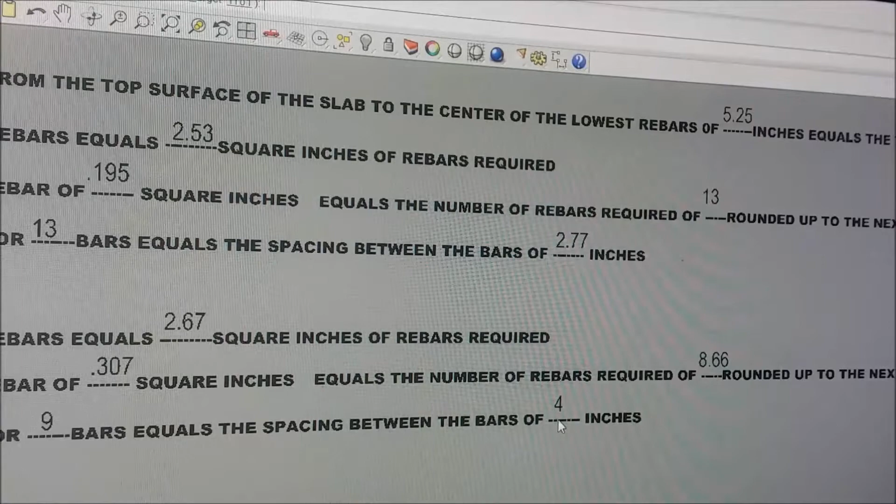You have other bars going the other way, like every third spacing, you have a bar going. It just keeps them from moving left and right. They have to be pulled only on their length. There's no strength to them left and right. It's like a guitar string left and right.

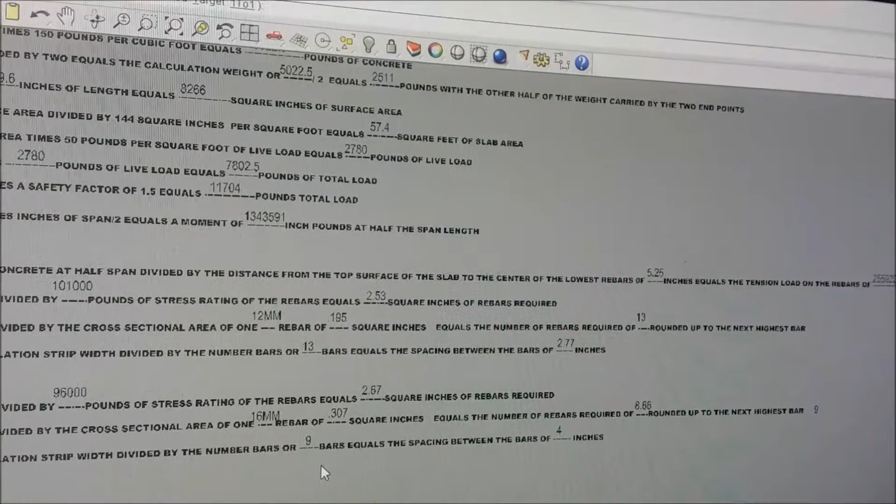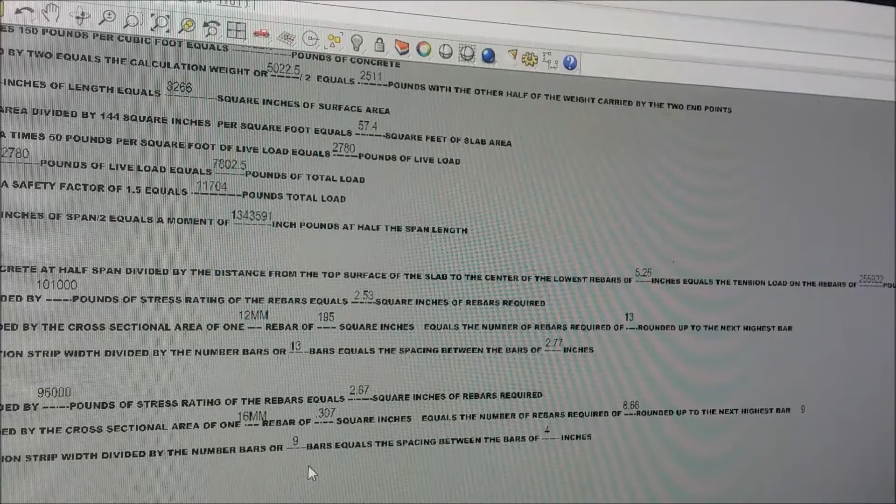Okay, taking up from where we left off, you'll notice we went to a larger bar, and we're using a lot less of them. The strength of the bars is lower, but we're using more square inches because of that. And we ended up with 9 bars instead of 13. So that's a pretty good savings right in there.

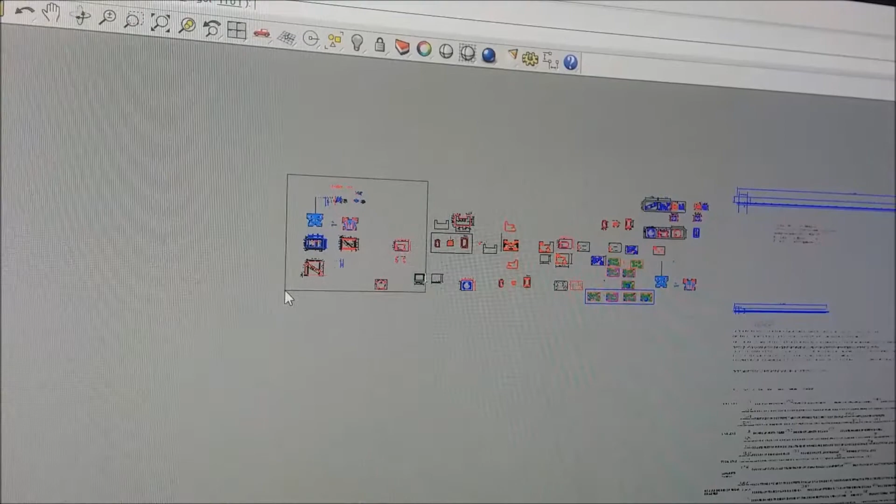And what do we got down here? Oh, okay, let's go on a field trip up here to something. What we have up here, I could change the dimensions on the drawing. Let's see, it's going to change on the ones we're going to actually look at.

Forget that. You'll notice that... please. What is it doing? Oh, the drawing auto saves because I moved the screen. It wants to save it.

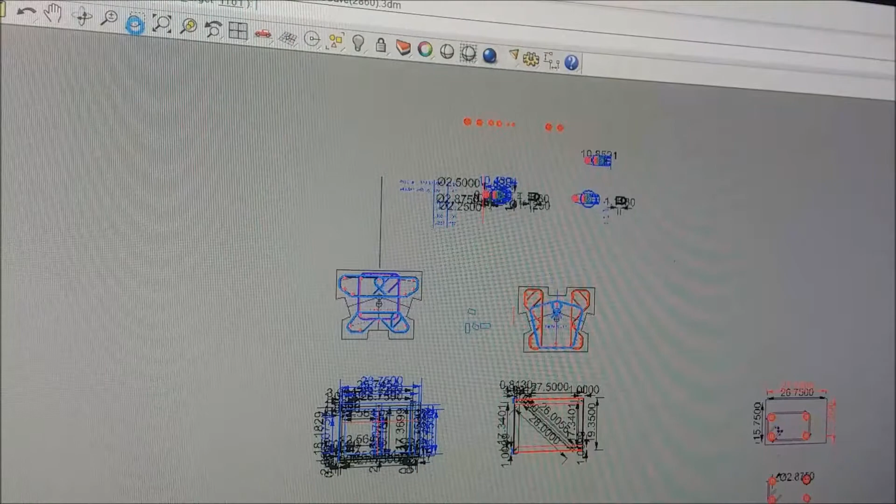Okay, you'll notice that every place there's a bar, these are looking down through the column, the rebar wraps around it like a corner, sort of holds it in both directions. All these rebars are near a corner. Some of them are on a corner. Some are at an intersection, near a corner, sort of near a corner, at a corner.

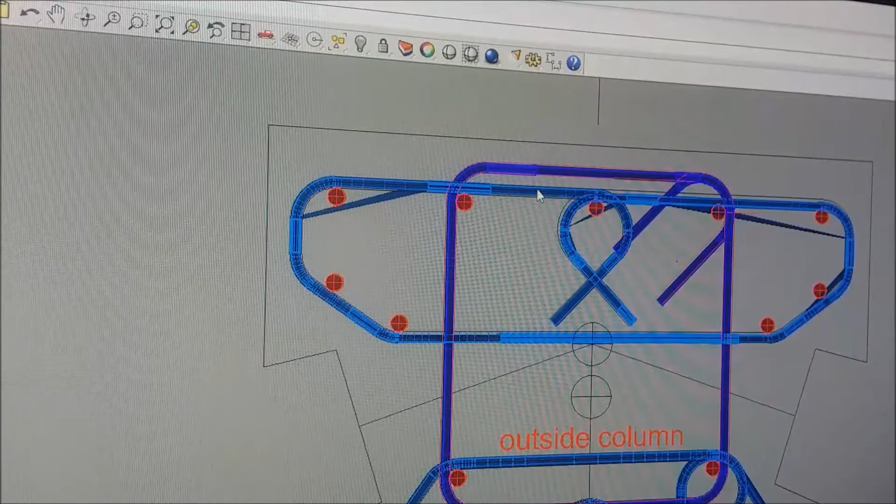This stirrup is 3 separate pieces: the dark blue piece, the square-looking piece, and then the ones I don't know if it was me or the employees, we decided to call them the butterfly wings. Also, it looks like a really fat little airplane to me.

So they're all in the same block. Okay, the outside black line, that's the shape of the column. And you'll notice there's a 2.5 inches deep, 7-inch wide notch cast into all of them. That's why we have all these weird angles, is to keep the bar cover near the shape of the actual concrete. If this was a rectangular post, we'd have the outer rectangle, and then where these other ones we'd have a square or rectangle surrounded them, so that they're still always around the rebar.

If you have one that's got, say, 3 across this end, 3 across the bottom end down here, down below where we're at, and then 3 on each side. Like it was this dark blue looking thing here. See, if that square was the outside rebar, but you would have rebars halfway. It'd be 3, 3, 3, and 3. So 8 rebars on a column, commonly done in the Philippines.

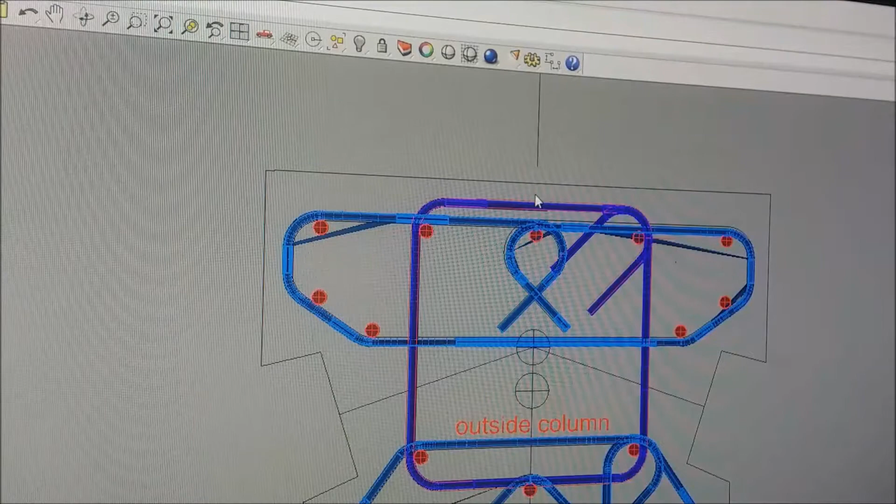You would see that a lot. What you do to catch these ones that are on the mid span, you put a diamond-shaped rebar in there. Recommended practices for reinforced concrete construction in the Philippines, published by the government, requires that diamond-shaped bar. And I have seen some expat builds that had them in there. I don't know who the architect was, but he either read the recommended practices, or he's a college graduate or was well read.

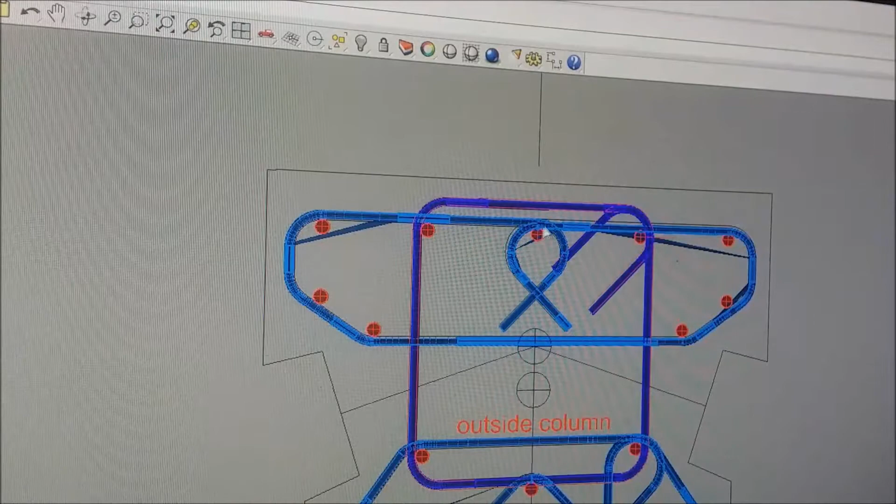Another thing you'll see on the stirrups is that this stirrup starts here, goes around, and then bends again. We call these 135-degree corners. They don't just get to that last place and go straight down parallel to the other one. Same thing with this one. It went around, all the way around, come back, and this keeps the rebar from being stripped out of the concrete. This is also required, and I see about 10% of the builds in the Philippines have the 135-degree ends.

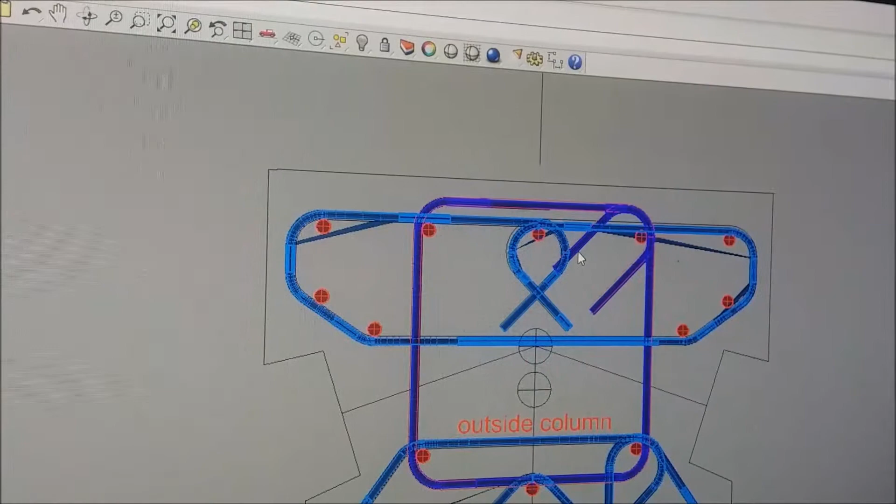But what we're here for... Oh, we can make a little rest stop here. This black line here is a steel plate that we have on a. It bolts to the top of the work table, which is 2 4x8 sheets of plywood. We use it for everything. And the red things here, you see, you could if it was bigger.

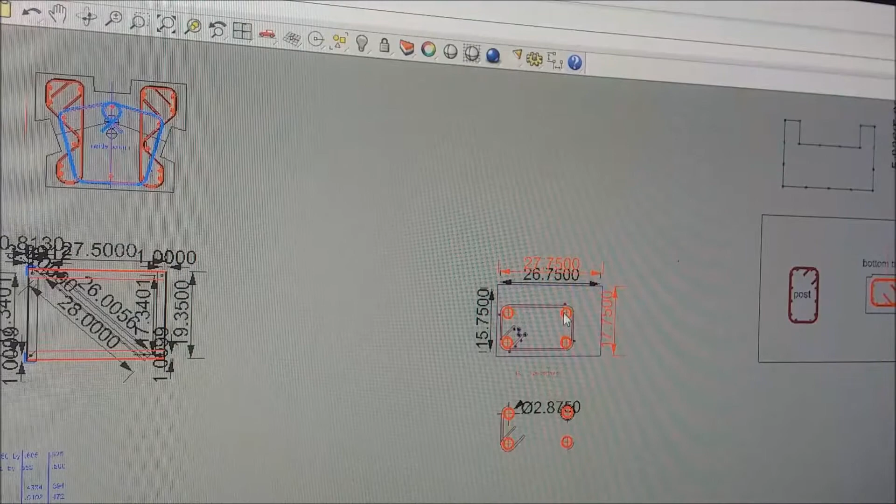These red things are Schedule 80 2-inch pipe, chosen because there's a minimum bend radius on rebar. Everything on rebar is measured in bar diameters, like 16 or 27 bar diameters of lap when you join two bars end to end. You should offset them so the two going away are exactly in line with each other. No, that's not done - it is done, but not by me. I've got enough problems, but that's the right way.

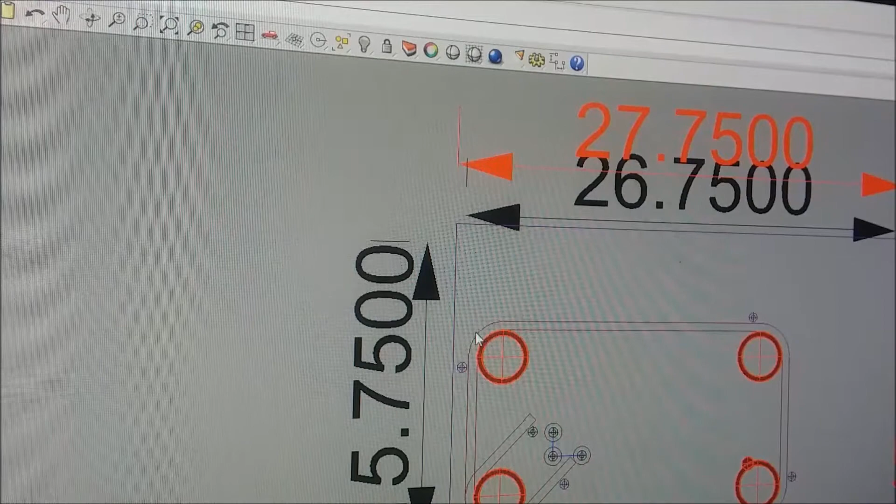This is the minimum bend radius for a number 16 bar, 16 millimeter bar, or number five - same thing. So it looks like our corners are big, but we're not bending them around a 3/4 inch bolt or something, which puts a much sharper bend. So with this, we have not overstressed it towards cracking. We've never had a bar crack when we bent them. Some people do, but we have the right radius - we don't have a problem.

There's bending plates for every shape we use. This thing just went off the screen - that's common beams that we use throughout the house. We only have about 4 sizes, I think.

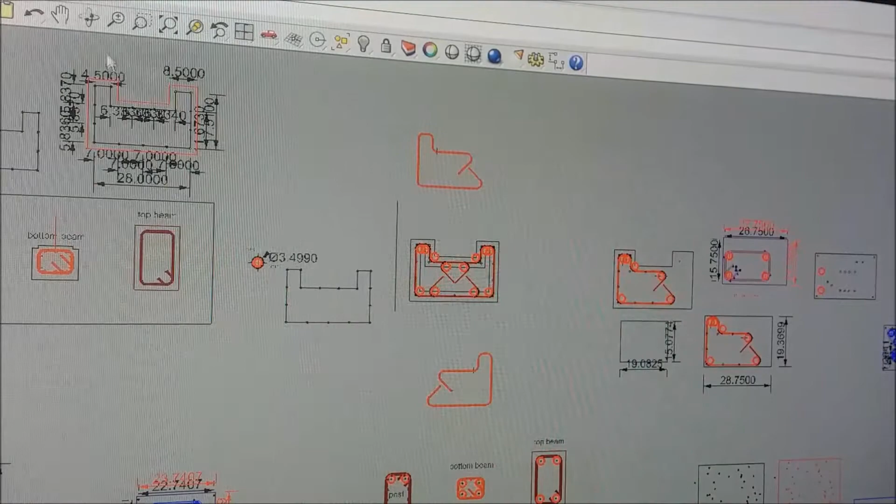This is the upstairs column. We call it upstairs, or we call it the closets - it's not really rooms, they're too small to be rooms. They're part of the ventilation system, but they look like rooms. We put actual stairs up there, so some days we call it the second floor. But there's no rooms, and it's got a 26-foot hole across the middle of it that's open for ventilation.

There's not really a lot of floor space you can walk on, but we have 10 columns. The black line is the shape of the column, and the pipes are what we bend this around. This is made as 2 pieces, a left and a right - that's why we have 135 degrees, because there's 2 actual bars.

This shape is cut out for an electrical sub panel. There's 10 electrical sub panels upstairs. We can hook any light in the house to any switch in the house. We can run a number 6 wire off any sub panel - if you wanted to put a large welding machine in the house while you're building it, just plug it in.

Also, because there's a big hole across the middle of the house, we don't want to run wire all the way around to get to something on the other side. So what we do is run a heavier wire to a sub panel, and that also gives you a lot more breakers.

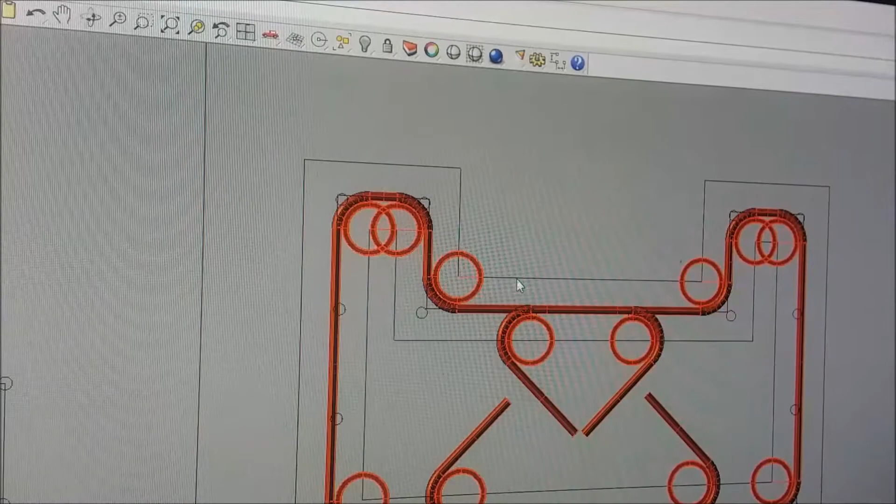We have 175 light bulbs in this house, LEDs - most of them are 6 watt. All of them can be powered by one 15 amp breaker and not even strain it. But we didn't want to have to buy all that wire and put the conduit in the concrete as we poured it for that many runs of conduit. And we don't - my personal preference, got nothing to do with legal or suggested or anything else.

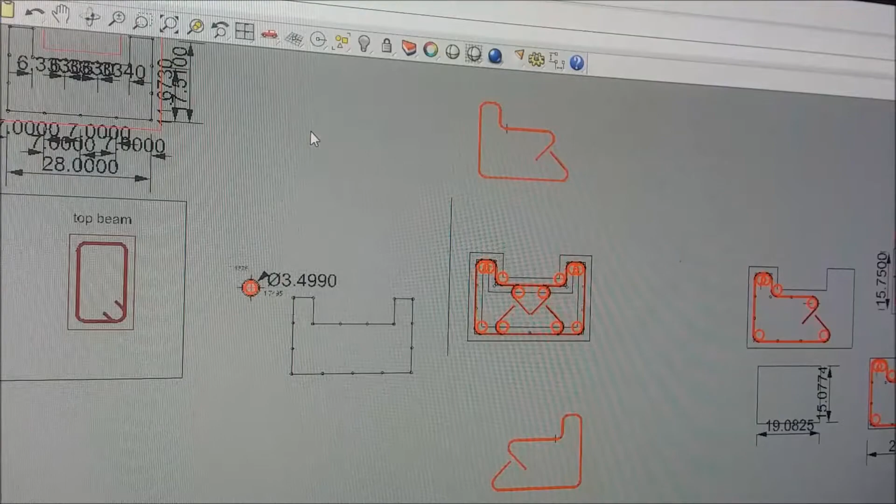I don't use B caps - what do you call them, wire caps, the little plastic things. Red is for the bigger size, and then you have yellows, and then oranges and blues for a smaller one. I just don't like to have those - I've had some trouble with people doing bad installations.

So that thing we just looked at, it's got a shape like this, and you flip it over, it makes the other side. But what we came over here to look at, other than the field trip - I have a reputation for field trips this way.

This is all the possible combinations of pipes - I think we have 3 of these plates, but you have 2 sides to a plate, and that gives us 6 times the area of our plate to bend rebar on. We have columns that are 32 by 35 inches, and all those rebars have been on these plates, so it takes up the whole plate.

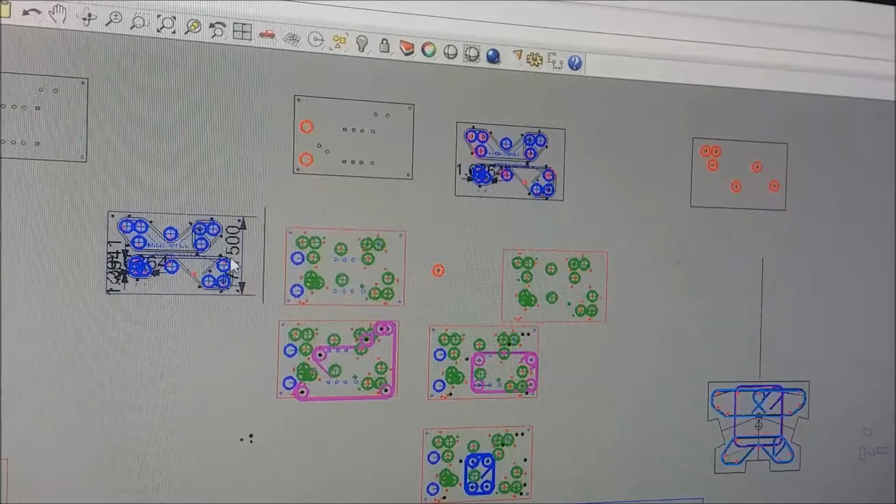We're going to sneak over here to something I might want to use in a minute.

Okay, I've chosen an example column. Actually, this is a beam laid down flat with all the bars on the bottom and the top. That's what goes around the dirty kitchen outside. It's like a footer beam, and all the loads are on these two surfaces. It's used also for upper tie beams on first floor wall.

It's 1.5 bar diameters up here, just like it is there. But the form has got a 45-degree corner. It's a US 4x4 cut on a diagonal, and that raises up this bar, and there's more concrete underneath it, of course, because you want to keep your 1.5 bar diameters.

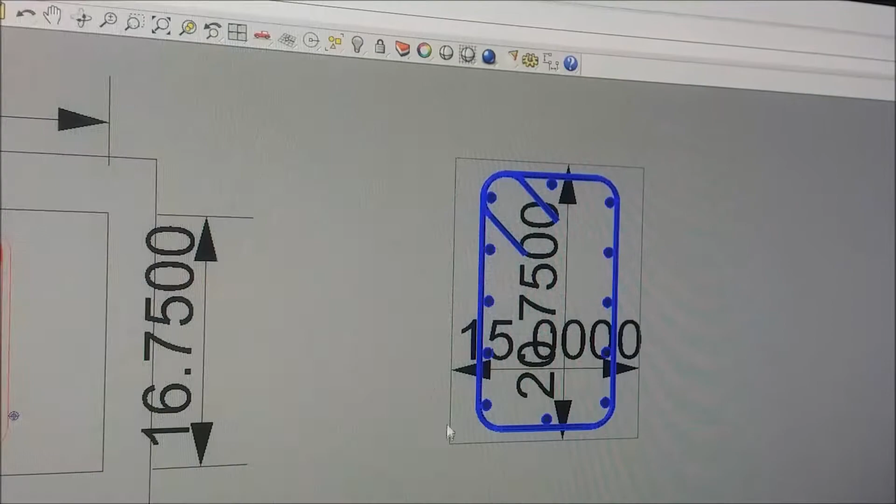And that is not a problem in this case. This is Villa Cecilia only, other than Texas Filipino, who has the same deal. I don't know other examples in the Philippines other than the R2 builds. He's currently showing his, when this was published, he's on his second floor and he's going for 3.

I have a 7-inch concrete wall, poured concrete. This beam and that wall are cast at the same time. So it's solid concrete, 7 inches down here with 45-degree corners. But a 7-inch poured concrete wall. That makes this the top flange of a beam.

The center between the tension and compression loads is half of 10 foot 1 5/32 inches off the floor, whatever that is. So this is all in tension, and the bottom is all under compression. But anyway, I've chosen this for example because it's used 2 ways: laid down and stood up.

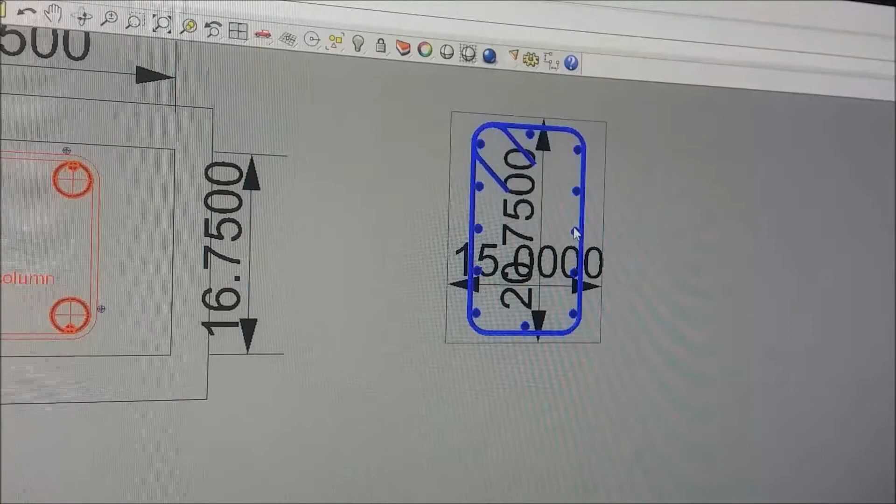The rebars for the stood up version are different, so we're gonna just assign rebars like we were doing the first design.

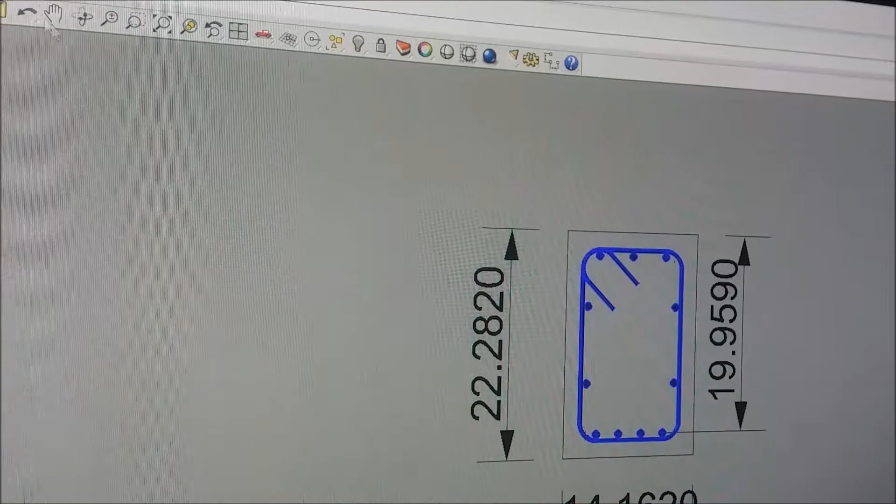And what I've done was I've changed the rebars. This is not the rebars we built with, but this is more representative of what your architect should have put in your drawings. It's sort of best practices.

And this depth here, that could be anything, and the width could be anything. It's the number and where you put them on the stirrup.

Notable things: 135-degree corners. We have 4 bars on the bottom. That's the tension side. We have 1 less. 4 minus 1 is 3 on the top.

That's recommended practice. In Villa Cecilia, we have the same top and bottom because I have no bending loads on any of the beams. Not one beam in the house has bending load. In the dirty kitchen, they have bending load because it's a monolithic floor, about 5.5 inches thick, you know.

Whatever it is, 1.5 inch cover, top and bottom. Anyway, this is the number of bars that's going to be restraining our tension load. We're going to assume it's upright and it's being pressed on at the top, and this is the tension side, and these are the compression side. So we need a number from the top surface to the center of the bars. That's this number.

For calculating the volume of concrete in the beam, we need the actual width and the actual depth. Depth times width times length. That's your volume times 150 pounds per cubic foot.

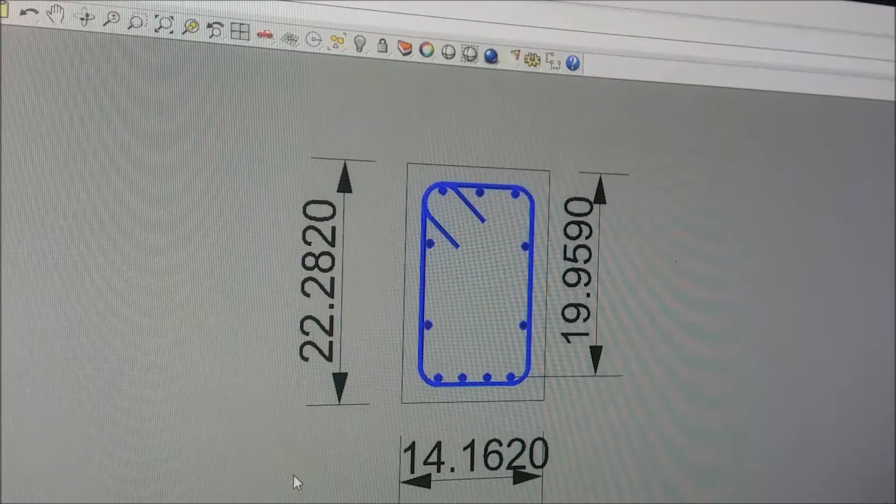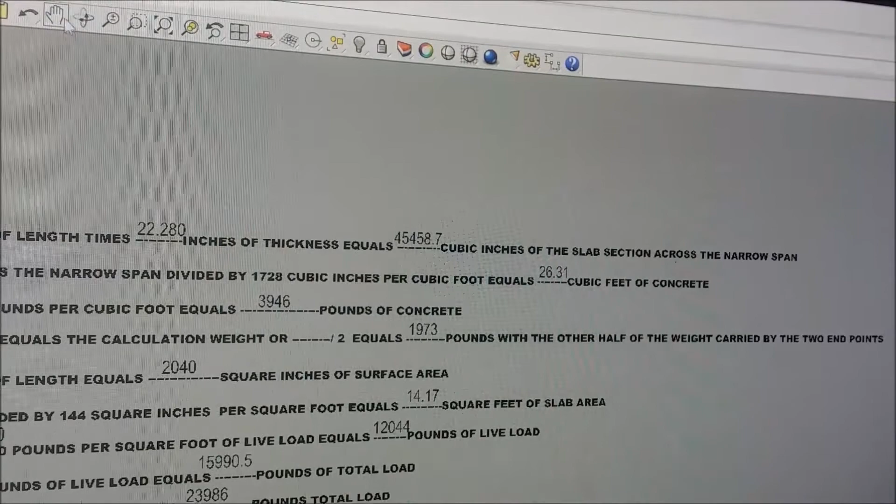So we're gonna take that same, what looks like a spreadsheet here, and run through the calculations. 14 minutes - I tell you what, we're going to cut this off and call it part 2, because I don't think I'll finish reading this thing and explaining it in less than 15 minutes. So we're going to stop here, and then we're going to come back.